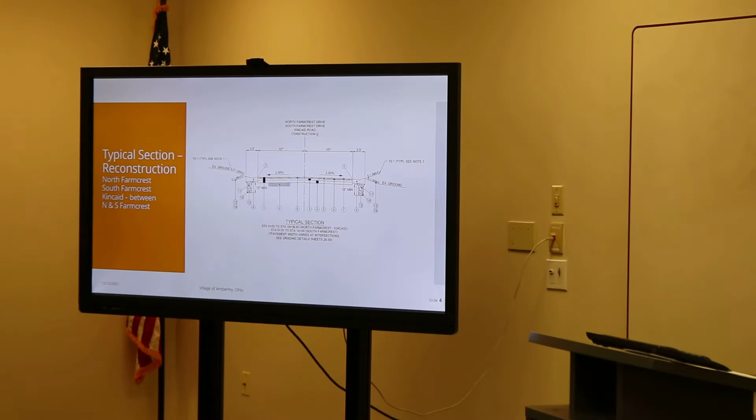The other purpose of the underdrain - I can't remember off the top of my head how many there are - but we will also collect downspouts that go through the existing curb or outlet right on the street. We'll take those underground and get them off of the street. Downspouts cause a lot of ice in the wintertime, and a lot of water through the other seasons of the year.

If I go too fast, I tend to talk fast, I'm sorry, it's just my nature. If I go too fast, please stop me, and I can either repeat something or slow down.

The other typical section is just that other section of Kincaid Road, from South Farmcrest to about 400 feet south of there, which is the low point in the road. There's some catch basins. The reason we are touching this section of street is that we are installing a number of catch basins at the intersection of Kincaid and South Farmcrest. South Farmcrest comes down, Kincaid comes down, there's a lot of water coming down through there, so we're proposing to capture that storm water. We have to take it somewhere. The existing storm sewer system is at the bottom of Kincaid Road, so we're running a storm sewer system down Kincaid.

Instead of just cutting a 3-foot wide trench through there and patching that trench, the village has proposed that we do a mill and overlay. So while we're not reconstructing that section of Kincaid, it will have a fresh asphalt surface on it.

So the other geometric modification we're looking to perform is to install a couple of grass medians within the subdivision. The first one is east of the intersection of North and South Farmcrest. The second one is south of the intersection of North Farmcrest and Kincaid, and north of the intersection of South Farmcrest and Kincaid.

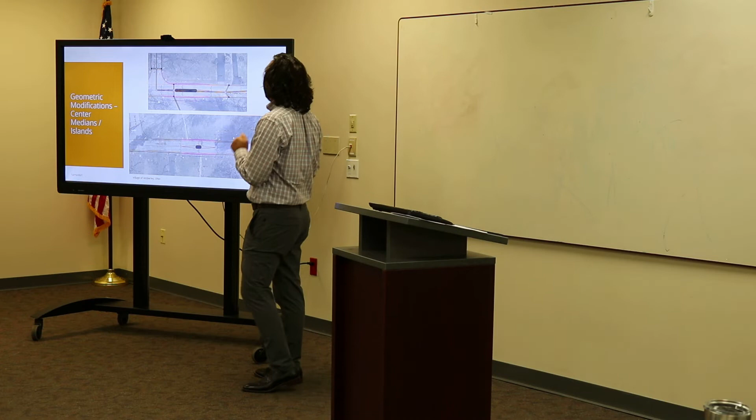So you can see the locations of these. Are those clear to everybody?

I have some addresses popped up there as well, which is insane because if you look at the intersection of North Farmcrest and South Farmcrest, the people on both sides of the street have address 3109—one is off of South and one is off of North. Does anybody live at 3109, North or South? Okay.

Here are some examples of these. I personally worked on the two with the portrait pictures. The one on the left is in the city of Blue Ash, and that one was only 4 feet wide. The reason for that is it's a 25-foot wide street, but their curb was a vertical curb, so we didn't want to reduce as much—we only reduced the lane width to 9 feet instead of 8 feet, because you don't have that same cushion with a vertical curb as you do with a rolled curb.

Also, that city was looking at putting in pavers. It's on Malsbury Road—I don't know if anybody's familiar with the city of Blue Ash. Malsbury was extended into Daventry, a residential development adjacent to Summit Park. The old section of Malsbury, which is like this side of the photo, was very industrial, so we wanted to slow traffic down as it entered the residential street.

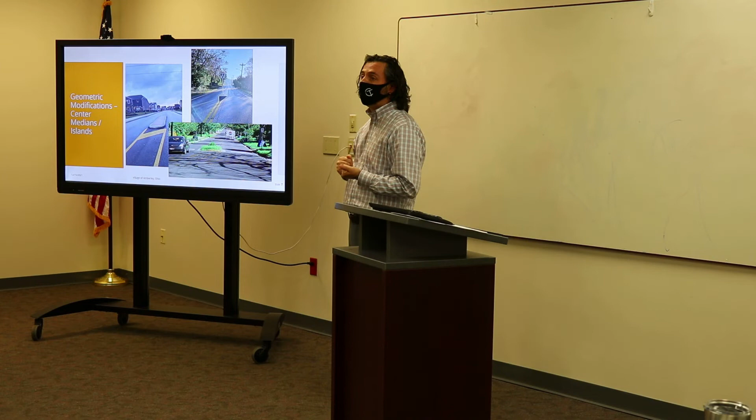And while we haven't done any follow-up speed studies yet, we have heard that it has reduced the speed in that area. This one came from my marketing group. I've been told that it was installed somewhere in Northeast Ohio, in our Cleveland area. It is green, which is why I asked that—I was like, I know we've done these, can somebody send me a picture of one? It's poorly maintained, so I apologize for that, but it's something similar to what we're proposing here in the village.

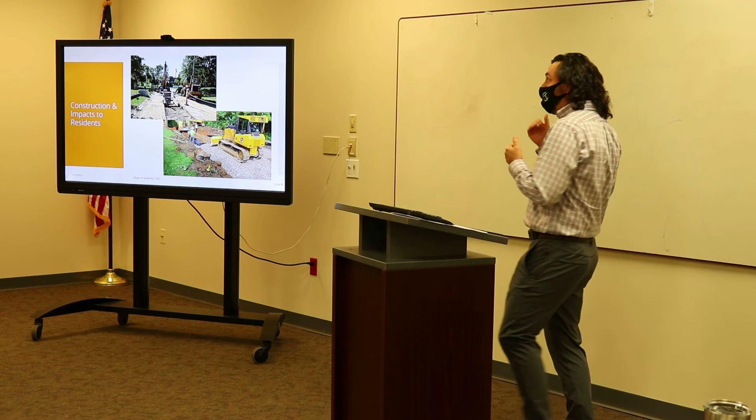So let's talk about some of the construction. It's going to be long and it's going to be hard. This is the bad news of all of this: we are going to be going down to dirt on your streets. It's going to look way worse before it looks better.

The contractors will make mistakes, and they will drop something in your yard. They will tear out a piece of your driveway that they weren't supposed to tear out. I mean, there's going to be headaches associated with this. We do lots of street reconstructions, and it never goes perfect, you know.

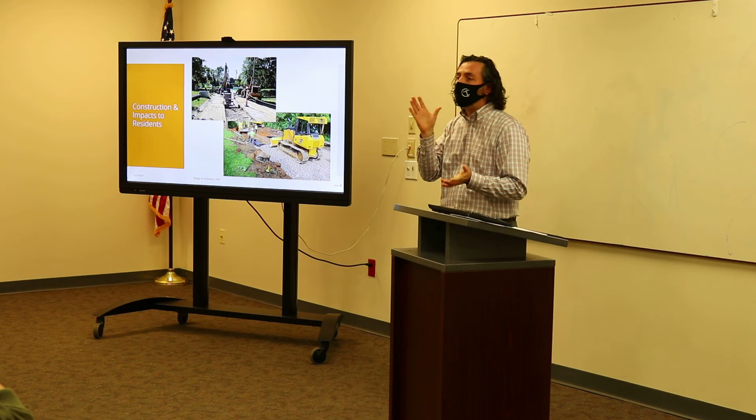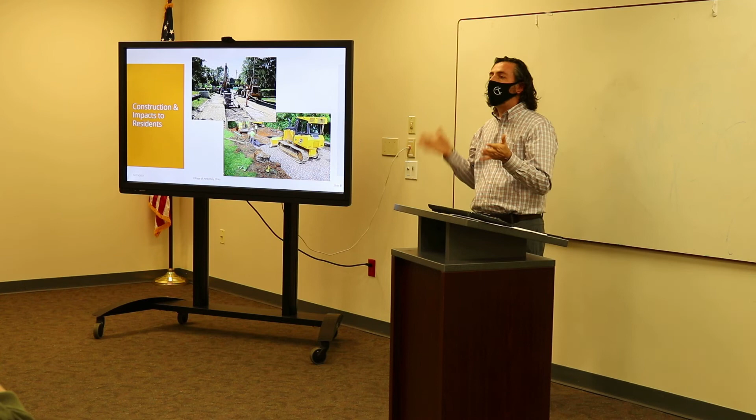So what I would anticipate to occur—and we can go over this in more detail in the spring when we have a contractor and know exactly how they're going to proceed—but typically on streets that are not dead ends, basically anywhere within these streets being worked on, you can get around in some way or another. What we've typically seen is the contractors are permitted to take up to 300 feet of roadway, and they're going to tear that 300 feet out.

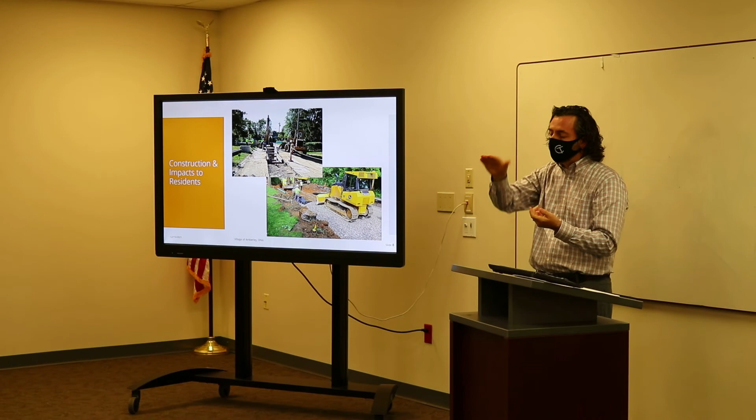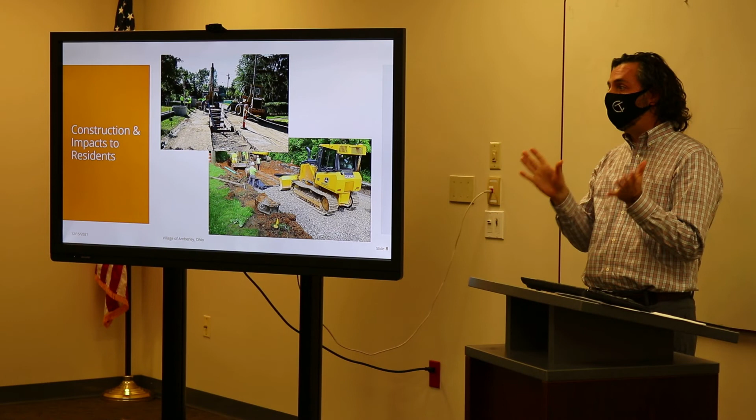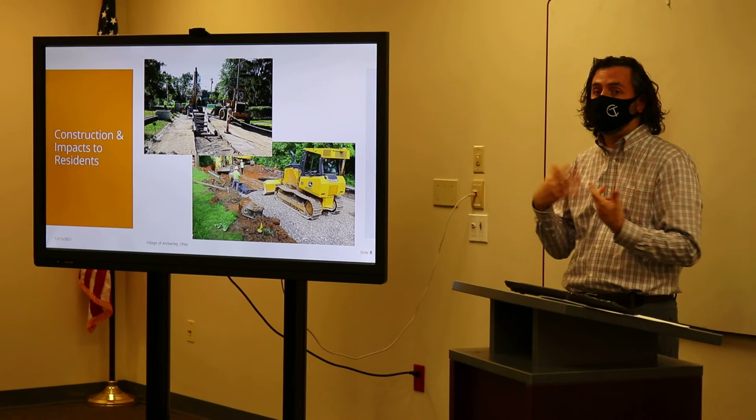While they're at it, you're going to get a new driveway apron, which will vary in length because we're doing a reconstruction with minor tweaks. But they're going to take out the whole width of pavement, and unless it's an emergency, you're not going to have access. Now, there are exceptions to that rule. If you have mobility issues, we can put items in the plans to make sure you always have access to your driveway. If you're aware of somebody in your neighborhood with a mobility issue, please let the village know. But basically, they will tear that out.

They will put the curb in, and the under drain. While that curb is curing, they will pour your driveway if you have a concrete driveway, so that once the curb cures, your driveway is also ready. So while the curb and the concrete in your driveway are curing—curing just means concrete has to set for a period of time before you can drive on it—they will start to install the pavement: proof rolling, aggregate base, asphalt.

One thing you'll notice: when they do the 300 or so feet in front of your house, the surface course will not be on there. So it's not a finished product. They won't put the surface course on until everything is done.

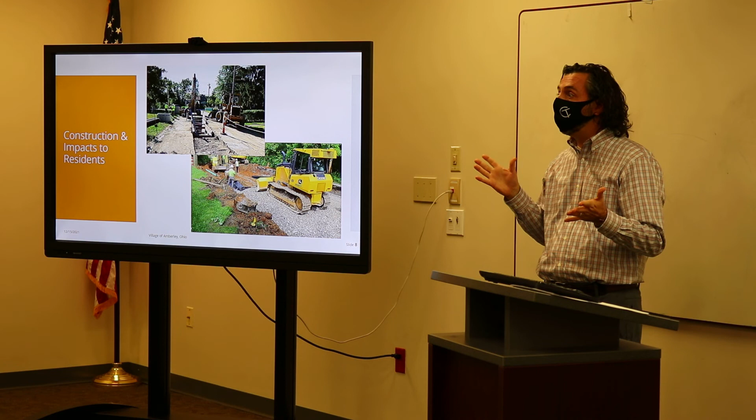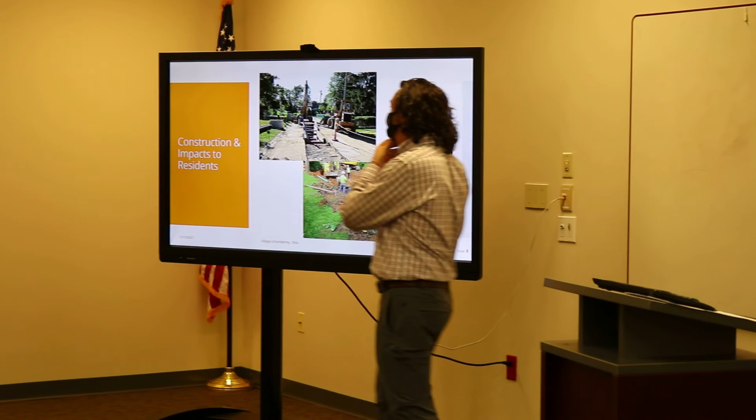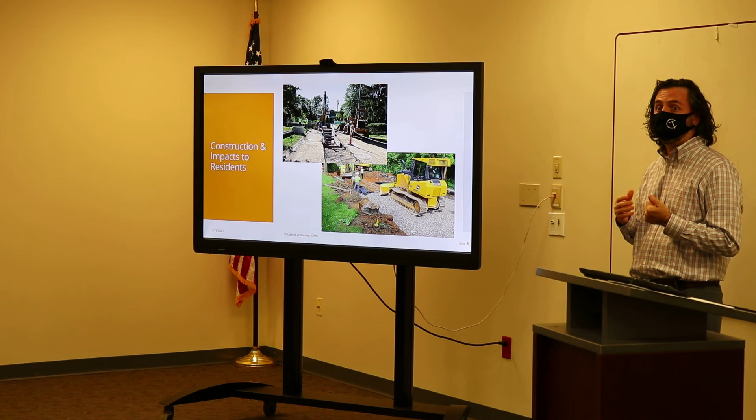But this is what it's going to look like in front of your house—there will be equipment of this size, and there will be contractors, there will be pipe in your yard. I've worked with a lot of great contractors. I've seen contractors carrying groceries for residents, carrying pumpkin seeds for residents, doing all kinds of things to help out the residents directly affected.

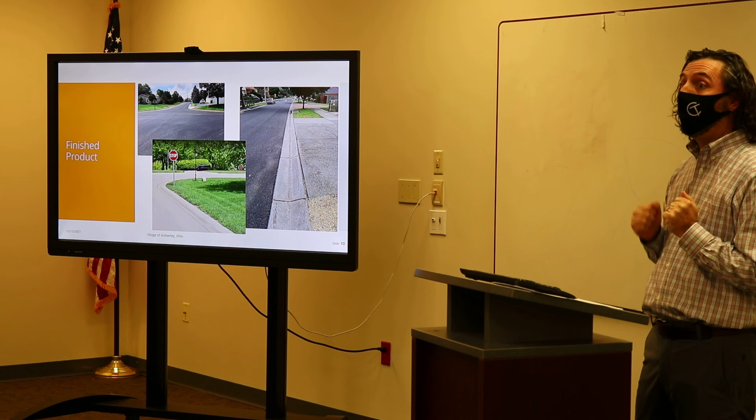But that leads to good news, because at the end of the day, this is what your street is going to look like: new curb and gutter, new asphalt. You're going to have green grass again one day, I promise.

So with that, we're looking for information from you guys. Scott kind of started to bring that up. If you're aware of any utility issues, any ponding issues, any neighbors with mobility issues, or any other issues within the right-of-way, let us know—we get a lot of information from meetings like this that we don't necessarily know about.